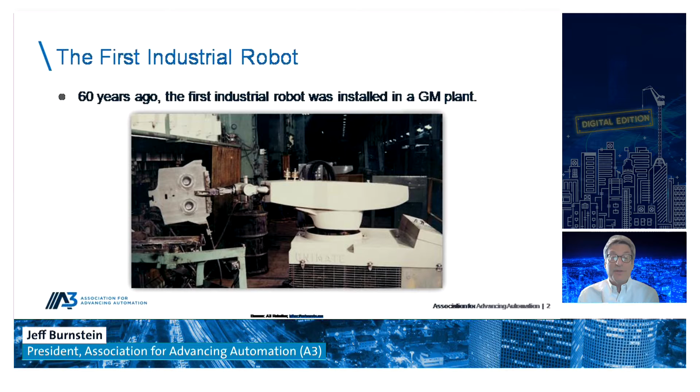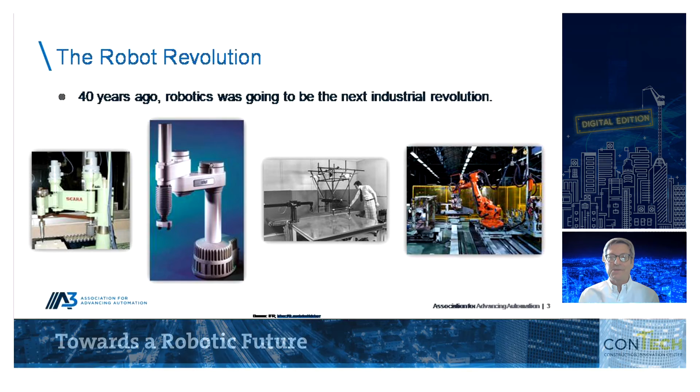The first industrial robot was installed 60 years ago in a General Motors plant in the United States. When I got involved 40 years ago, robotics was going to be the next industrial revolution. There were going to be millions of robots in every industry, people were going to be put out of work. There was all sorts of fear. Any of this sound familiar? Because we're hearing a lot of these same things today.

Now, the reality is it's only been in the last decade or so that robotics has really taken off globally. This was a very slow revolution. In fact, it was more of an evolution.

If you look at what's going on in the world, you see that we had a steady rise in robot applications outside of the Great Recession. The recession ended in 2010, things took off primarily in China.

The biggest player in applying robotics over the past decade has been China. They now lead the world and they are all in on this technology. They have a long way to go.

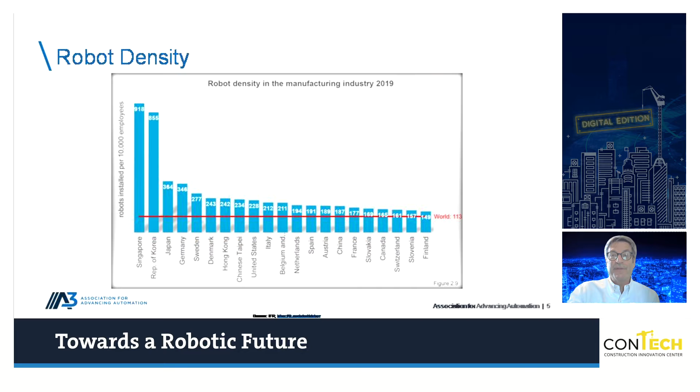Look at the number of robots per 10,000 workers. You see Singapore and Korea at the top. China still has a long way to go to catch up with them. So we're early in the China story as well.

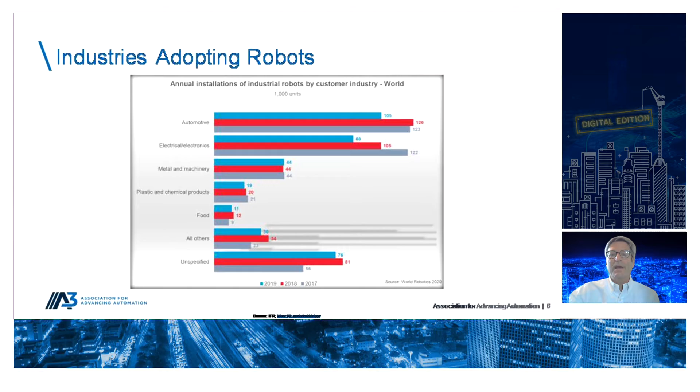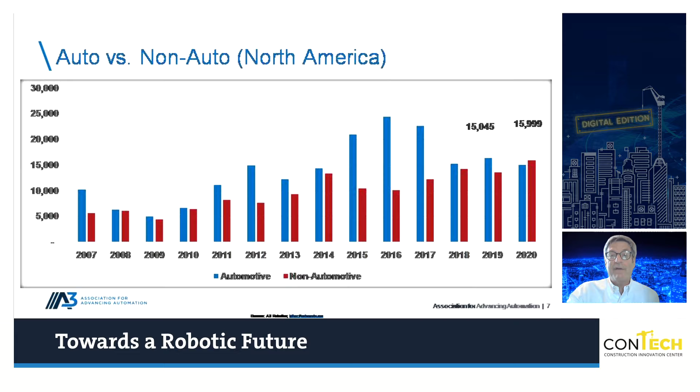Who's using them? Traditionally, the biggest users have been the auto companies, electronics, but now we're seeing it spread. Metalworking, food and beverage, consumer goods, all sorts of industries are now finding out how robots can help them become more globally competitive. We hit a major watershed moment in the United States at the end of 2020 when for the first time the non-automotive use of robotics topped the automotive use. That was a big step forward because it shows just how quickly robotics is spreading to every industry.

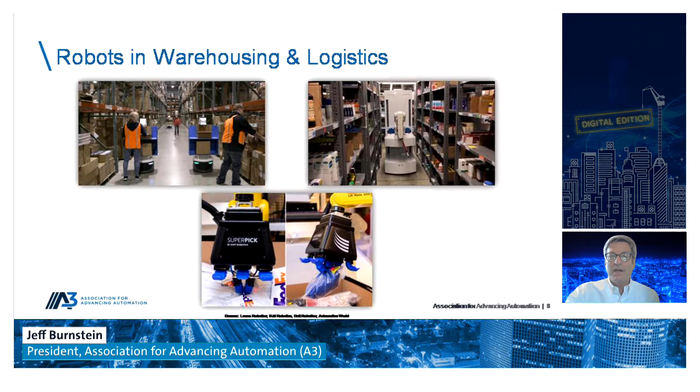Another major industry user, warehousing and logistics. This one has really come on fast. Amazon, Walmart, Target, all of these companies applying robots, mobile robots, and new technology with all sorts of applications for picking and packing and moving things around.

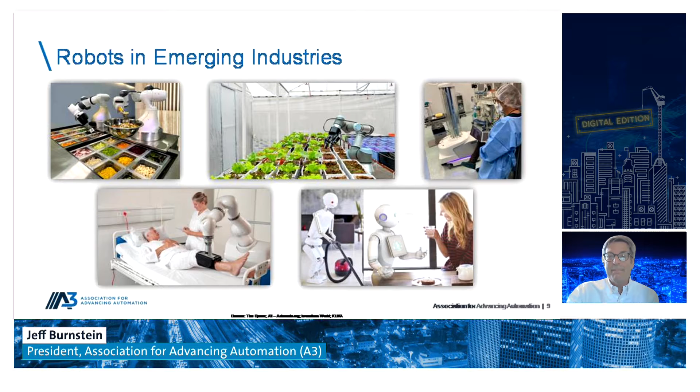Now, how about other industries that we're seeing? Food, retail, indoor farming, disinfection during the pandemic, medical, all kinds of areas where robots are playing a role that they weren't just a decade ago.

Now, what about that job story? Well, we believe robots save and create jobs. We think the biggest threat to jobs is when companies are no longer able to compete, because that's when all the jobs are at risk. Technology changes have always changed the nature of jobs. In the United States, we used to have 70% of the workforce worked on farms. Today, it's about 3%, and yet we have better, safer, and more food. The reality is, the new jobs that are emerging are better, they're higher paying, and they're safer jobs.

For instance, how many of you would have thought there'd be a great high paying job called search engine optimization specialist 30 years ago? Or app developer for iPhone? That's kind of a trick because the iPhone wasn't around 30 years ago. But these are all good jobs.

The truth is, if you focus on your fears, we're going to miss out on the opportunities. I mean, just think about driverless cars. People are afraid, well, what if there's an accident, if the car hits somebody? Well, we lose hundreds of thousands of people a year globally in auto accidents. Wouldn't it be great if driverless cars could reduce that by 90% or so, even if there were a few accidents?

What we're seeing right now, the skills gap is the biggest impediment to the future use of automation to take advantage of all these great technologies. We don't have a trained workforce in most countries that can handle the jobs of the future, actually the jobs of the present. We have to start early in the education process, we have to train, and we have to retrain the current workforce.

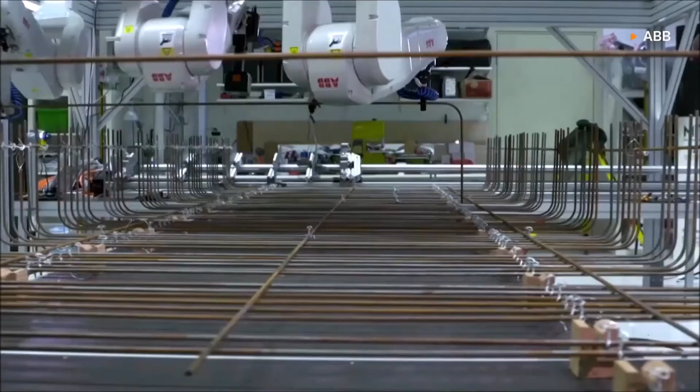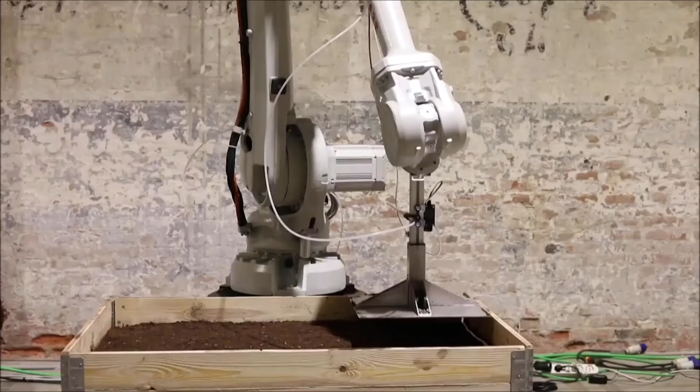ABB currently uses robots to install elevators, automate the production of components for prefabricated homes, or weld together steel reinforcement baskets to strengthen buildings. Sami Atiya, president of Robotics and Discrete Automation at ABB, says: 'We are developing new solutions for the construction industry because there is a perfect storm of high demand and the need for sustainable solutions, and also a lack of people who are willing to work in this dangerous and dull work.'

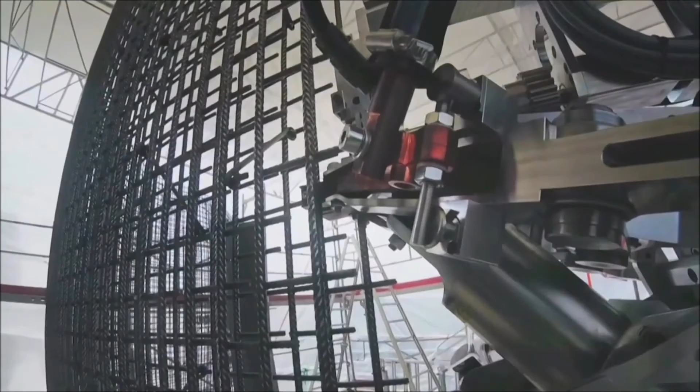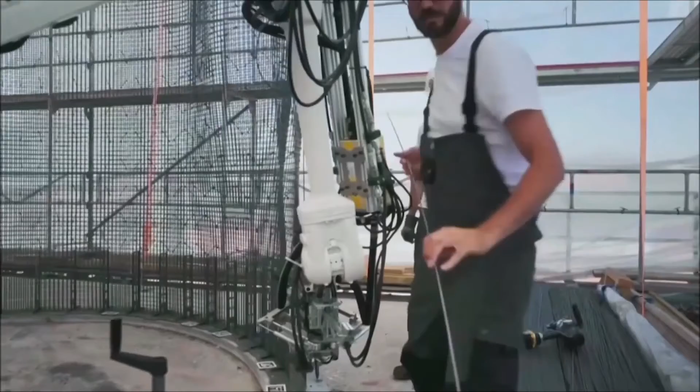While the company's sales in the automotive market are estimated to grow by 3 to 5% in the coming years, Atiya told Reuters that the company's pivot to construction looks to be a stronger bet. 'This is a high growth area for us. It is, I would say, where automotive was 40 to 50 years ago - low density of automation. So we expect 20 to 30% growth. It's still on a small base, but the industry will have high demand for robotization and automation to improve their quality and reduce waste.'

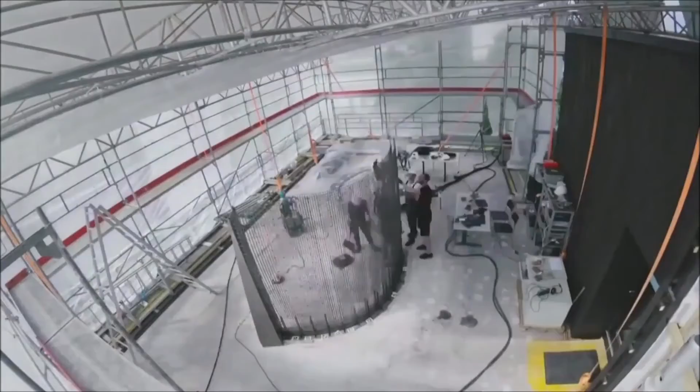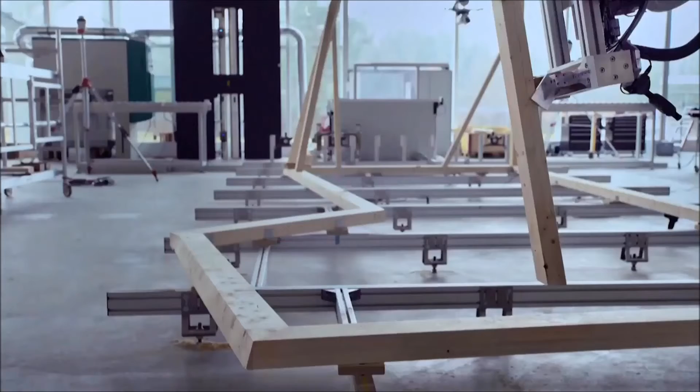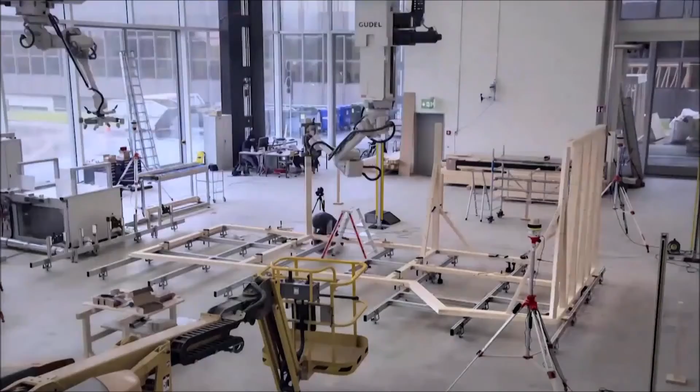ABB surveyed nearly 2,000 construction companies in Europe, China, and the US, and 81% said they would start using or increase their use of construction robots in the next 10 years. Selling robot systems can cost from $100,000 up to $1 million. Atiya said he expected a recovery in the Americas and Europe after orders fell in the first quarter, and the 'fantastic growth' in China to continue.

Now I'd like to talk about Boston Dynamics. You may have seen their Spot robot - it gets lots of attention. They are looking at one of the application areas for this robot being in construction. Let's see the video.

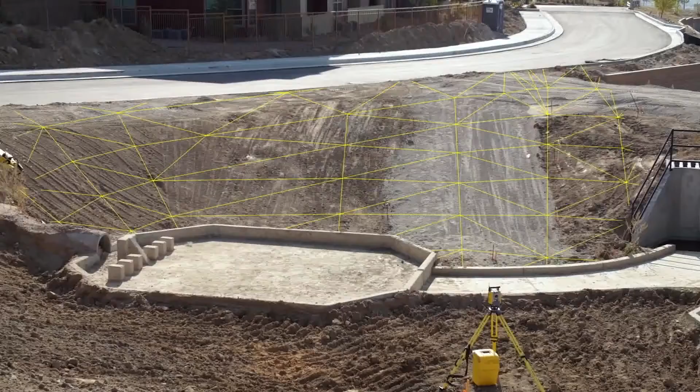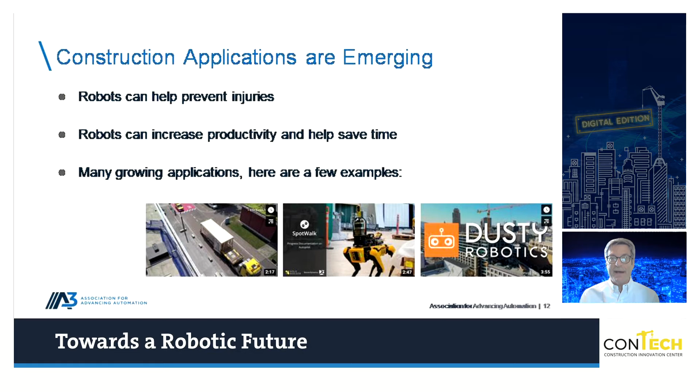And finally, I want to show you a video from Dusty Robotics. They are a startup company that just received over $30 million in venture capital. They're doing some really unique things with the application of robotics in construction.

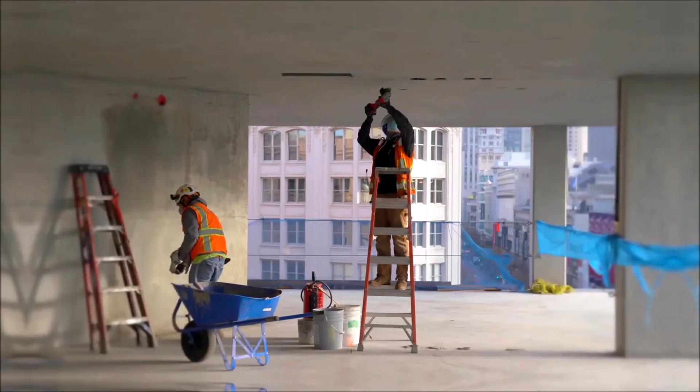We're correcting problems that were discovered in layout and giving them the opportunity to fix the problem so there's no comebacks later after it's built. Now we're turning in an observation report and we're resolving those issues before construction starts.

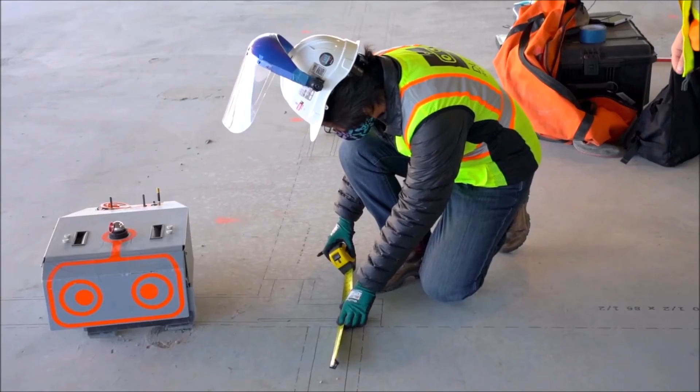I like the accuracy, but also the additional information that comes with the robot. So right now we're able to chase and solve those smaller issues several months before we normally would be able to see it.

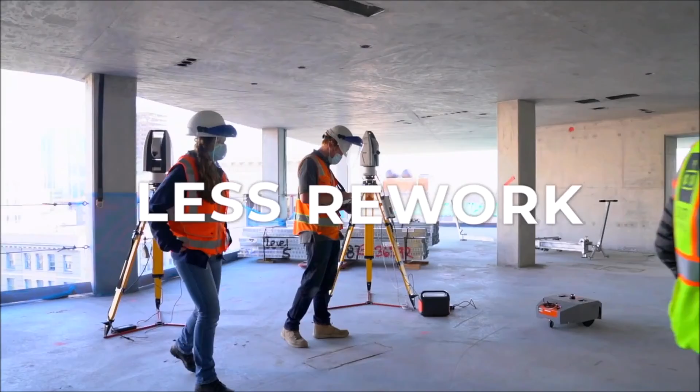Layout quality is super important. We've actually been able to find a lot of issues with MEPs or any of the plumbing that might be off, or any of the shafts that might be off, and we've been able to fix that before we started any framing. So that right there is saving us a huge amount of money.

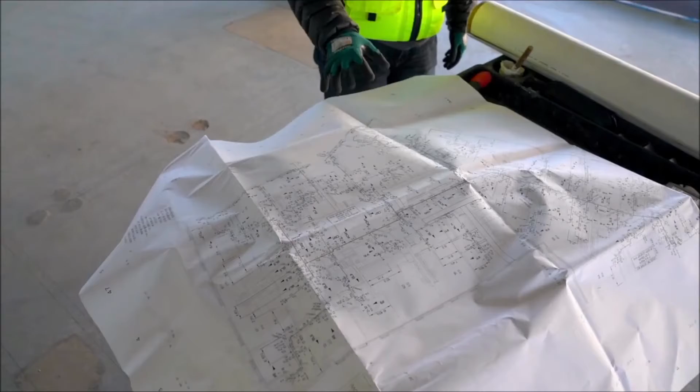And I feel really, really confident with our layout, knowing that it's coming straight from the CAD files. One of the biggest value props that we bring to the job site is that we are taking the digital model that gets designed in the pre-construction phase, and we are bringing that out exactly, literally, into the field. And that accuracy gives all builders the confidence that they're building exactly what they're supposed to be building, and they don't have to come back and do any rework.